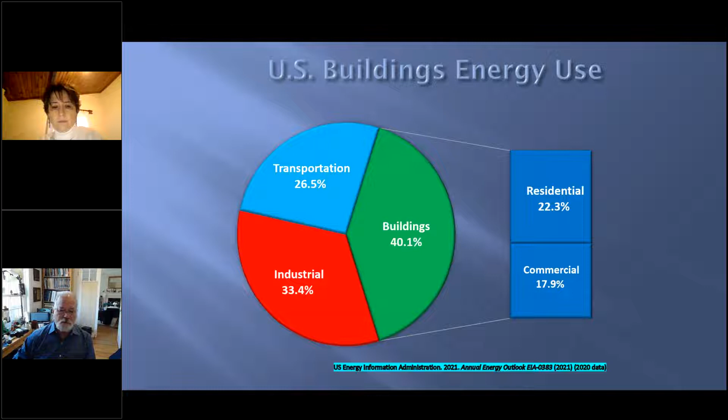In terms of energy use, it's important to understand that it's not just the typical things you may think your homes have, or even 20, 30 years ago - heating, water heating, maybe cooling, refrigeration, and some other appliances. But today we have many more things going on. We have more appliances, our televisions, even our computers are beginning to take more of a role there, even showing up on here as 1%.

But I think the important thing to see on this chart is not just those individual ones, but the other uses. A full quarter of things going on in our homes, energy uses, are now small devices like our phones and all the other things connected to the internet that weren't there even 15 years ago. So a lot of energy use is going for that hasn't been there in the past. So if we're going to deal with residential energy use in particular, we have to deal with all of it, not just the top 2 or 3.

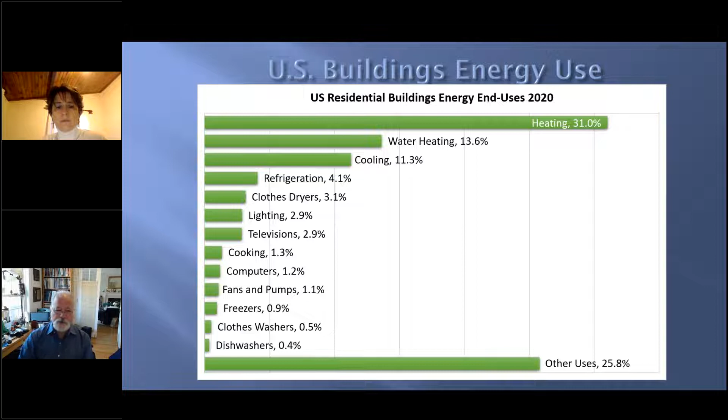In the commercial, non-residential sector, there is no typical building. If I were looking at a supermarket or grocery store, refrigeration would be a full half of the energy use, followed by cooling and lighting. So it definitely depends on the building type.

For offices, we're probably talking cooling, lighting, heating, and ventilation as our top uses. But there are a whole slew of other uses here, in this case 28%, and that's not including office equipment and computing, which contributes another 13% of the energy use - quite a large proportion.

So if we're going to deal with decarbonizing, looking at carbon as an issue, we have to deal with all the aspects of how our buildings use energy.

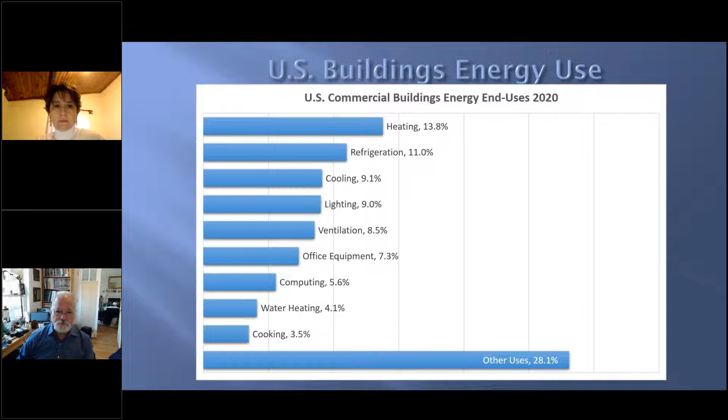So on to the topic, looking at climate change. First, let's look at some definitions - they're not the same. Weather is what's happening now: what the wind speed is, where the wind's coming from, what the temperatures are, what the humidity is, cloudiness, pressure, etc. It's kind of an instantaneous snapshot of what's going on. Climate is a composite of that over a region, or maybe over a series of years.

In fact, many times we talk about it being 2 degrees above normal, or very cold for this time of year, and that's based on a climate snapshot. In the meteorological world, they do a 30-year snapshot, what they call normals. So our latest set of normals would have been through 2020, and we compare to that past 30 years to see what's going on. We are seeing changes there, as you'll see as I move forward.

This is a snapshot from just before 6 in the morning to 6 in the evening, just one day at a research laboratory in Colorado. What we're seeing here is the variation - it's not static like we see if you're used to working with weather data for building simulation, where we're looking at hourly snapshots. You can see here this is changing at a 5-minute increment, which is more about the measurement than anything else.

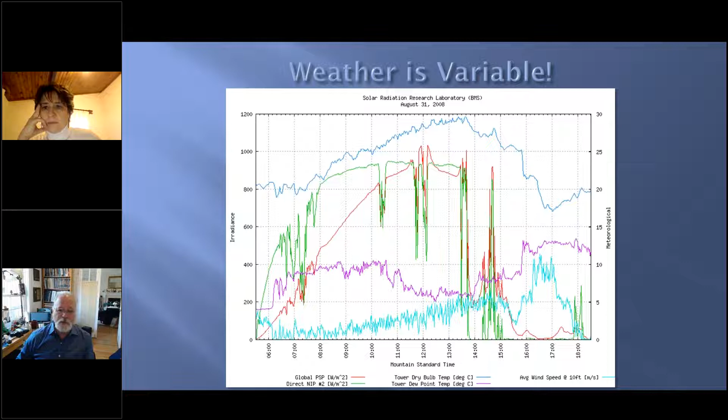So the New York Times has been publishing these really fantastic infographics where you can put in your city and see how much warmer it's been. 2016 globally is still the warmest year on record. I put in Istanbul, but I could have put in any others - I looked at Ankara, and it was similar sorts of things.

What they show you is a normal range - you see a gray area behind the red bars, and the gray area is kind of normal. What you're seeing is that for much of 2016, from winter through spring through summer, it was much warmer in Turkey, particularly in Istanbul. The average temperature is supposed to be about 16.6, and that year was 3 degrees above that normal - quite a bit more change.

At the bottom, it's a little harder to see, but total precipitation for the year was about 20% less than normal, so that can play into this as well. So this is one range of that.

The second warmest year, they did similar sorts of things, and in this case Istanbul was even warmer - it was a warmer year in 2019 than it was in 2016, and we'll see that vary. The global average doesn't mean it's always the same, but we're seeing consistently higher temperatures in winter, spring, and summer throughout the year.

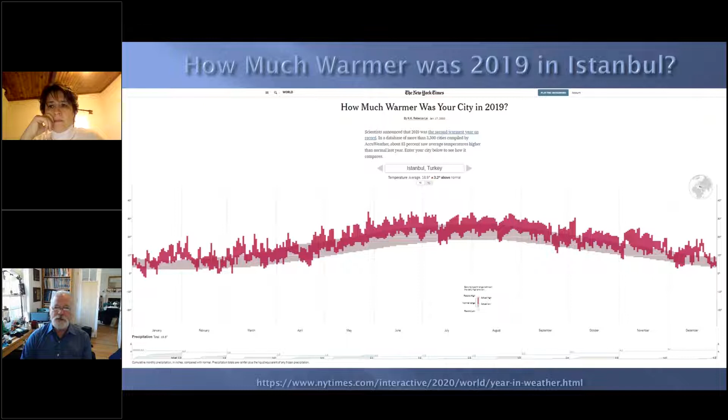So this gives you a snapshot of what's going on globally. Several things here - you'll see lots of gray right now, because there's no data back in the 1800s. As we get to about 1880, we get more consistent data.

You'll see that for much of early in the century, and even back to 1850, globally the temperatures were below that. Starting in the 1970s and 1980s, we're moving into the reds and oranges, and even in the 1990s we get some back and forth, with cold spots and hot spots globally, but consistently we're seeing that trend. By about 8 years ago, temperatures were already above that range, in the range of half a degree, and now in the last 5 years, the hottest on record, almost a full degree globally above that. So it's visible that from 1900 through today, we're seeing almost a degree and a half temperature change globally.

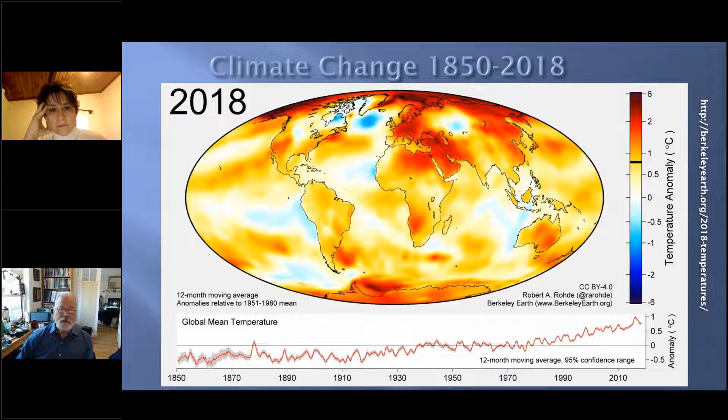In 2019, it was a particularly hot year in some places - China, South Asia, many parts of Africa, some parts of Europe, not so much in the United States, but Central America, South America, and in Australia they had a particularly horrible year, seeing temperatures in excess of 40 quite regularly, which was unusual for them. So it varies - it's not consistent throughout the entire world.

Another indicator is the North Pole sea ice, because since it's not on land, it doesn't stay frozen. If you watch the chart, it starts at about a volume of 25,000 cubic kilometers, and by 2017 it's dropped to only 15,000 cubic kilometers. So we've lost quite a bit of sea ice in that time.

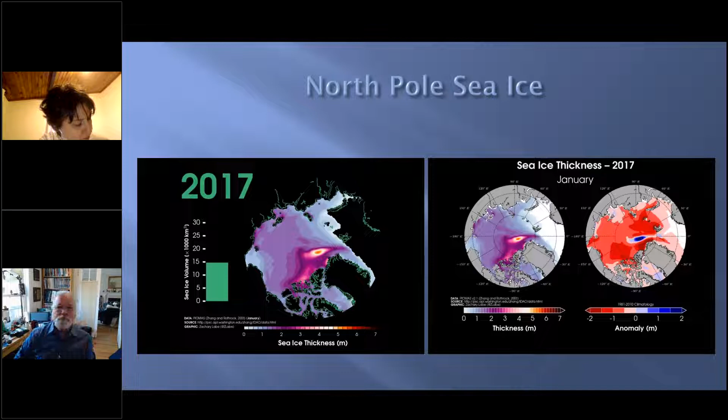We are also seeing temperature anomalies. I mentioned Australia, in the center, with very extreme temperatures hitting there, causing wildfires and very dry conditions. On the left, you see the far north in North America, and even parts of Asia and Europe, with northern parts of Russia and Scandinavia hitting record temperatures, so that in January it was above freezing at the North Pole, which just doesn't happen. In the US, we've had unusual temperature excursions of 10, 15, even 20 degrees above normal in what would normally be our cold time of year, January.

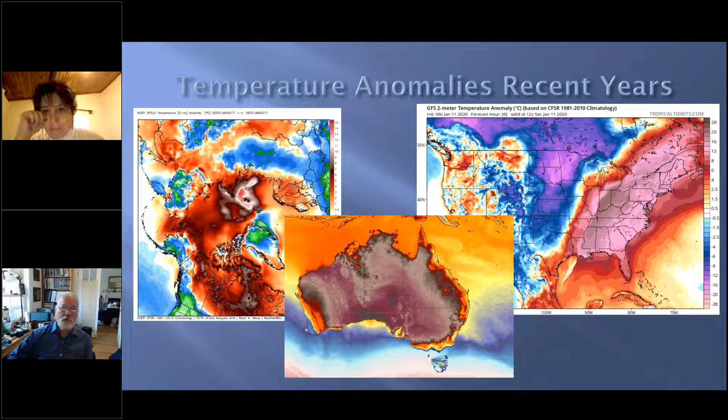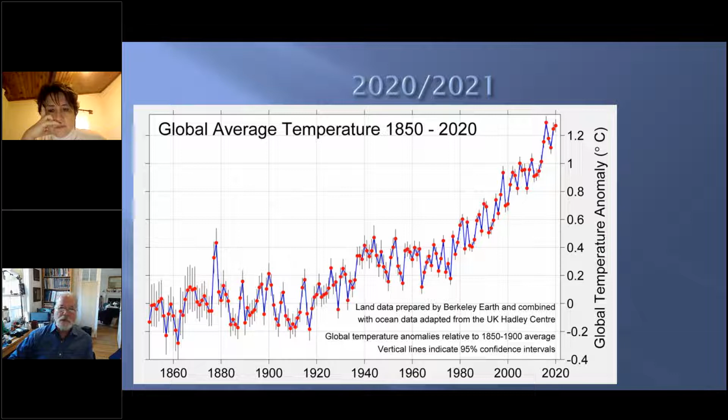Looking at that same data, the global average temperature through 2020 is already above 1.2 degrees, and the last 5 years are still the hottest on record, continuing that trend. In 2020 you see warm spots and hot spots, and in 2021 it's not consistent - India particularly had a cooler year, as did parts of Central Asia and Antarctica. But in general, globally, the Northern Hemisphere was quite warm this past year.

There's a great resource, berkeleyearth.lbl.gov, that you see at the bottom. I pulled up what it shows for Istanbul, able to extrapolate back based on the data they have to 1758, so we have 260 years of data to show what's going on there.

You'll see some temperatures - in the early 1800s the mean temperature was a little higher, then it dropped back. But if you look from about 1840 to 2000 or so, we have a trend that it's getting progressively warmer. Then suddenly, just about 2000, that change has gotten more significant. So the mean temperature for Istanbul, instead of being around 13.5, is now up over 15, and that is increasing. You see that in the ribbon bar at the bottom, which shows a snapshot for each year over the last 150 years, and the average temperatures there are progressing from the blues to the reds. So we are definitely seeing that trend already.

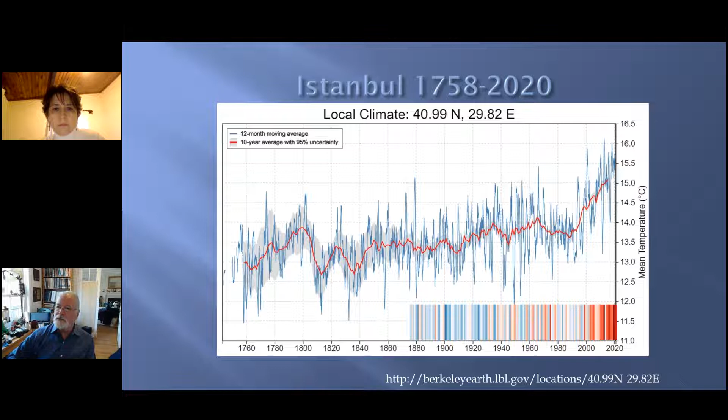The other thing to look at is the coldest and hottest months. In the past 15 years, only 3 months have actually made it into the top 10 coldest, setting records for that range. If we add the hottest months, almost all of the records and most of the temperatures in the last few years have been set in the last 10 years or so. If you go to the annual column, you'll see that 2018, 2010, 2020, 2019, and 2014 in Istanbul were the 5 hottest years.

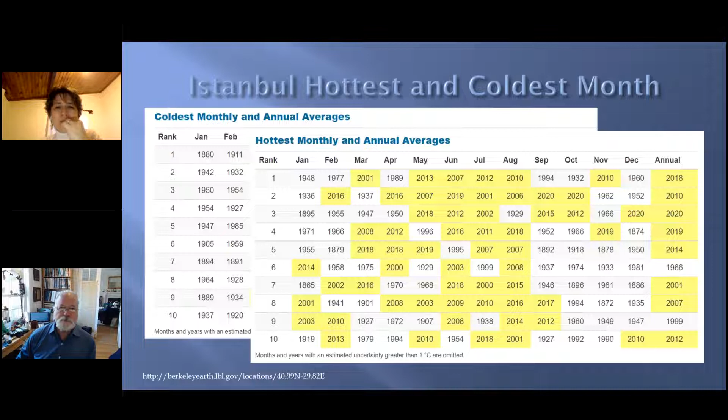If you look at the high temperature too, you'll see that we're seeing a range in extremes as well. The uncertainty gets better as we get to about 120 years ago. But if you look back about 2000, the...

Average max temperature in Istanbul was about 18.5, and now it's moved up to 19.5 in just 20 years. Similarly, we're seeing low temperatures also increasing, so at 2000 we're looking at 9.5, and we're approaching 10.5 at this point. So we're seeing a shift to both the high and low temperatures here, which is consistent with what the models show.

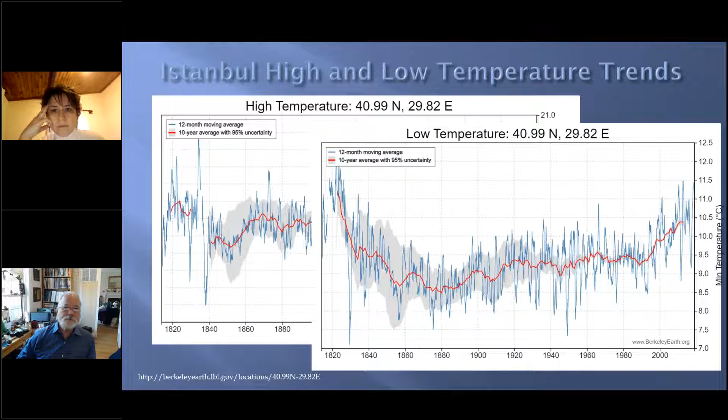There's a great book if you're interested in building performance simulation that has many topics, 22 chapters working on different aspects of that. But one of the chapters specifically is weather and climate, and how do you deal with that? So my next part of the talk is going to be derived from that, and I'll show you some of the information.

So what we talk about in that chapter are applications for simulation, and then what are their needs for climatic data and how they deal with it. So if I'm looking at doing energy evaluation, energy design, maybe compliance analysis with standards, I need a full year of data. Typically hourly is about the best we can expect.

So if I'm looking at other things, maybe equipment sizing, second column, third row, design day or short period calculations, where you're using near extreme conditions to size your equipment.

If you're trying to calibrate a model to existing building energy use, you might need weather data during the period that's collected near the building site.

And other things, you may need natural ventilation design, you're going to need local wind, and that's one of the very difficult ones. The sources for much of our data is still from airports. There are new sources available, but needing locally measured data is pretty important today.

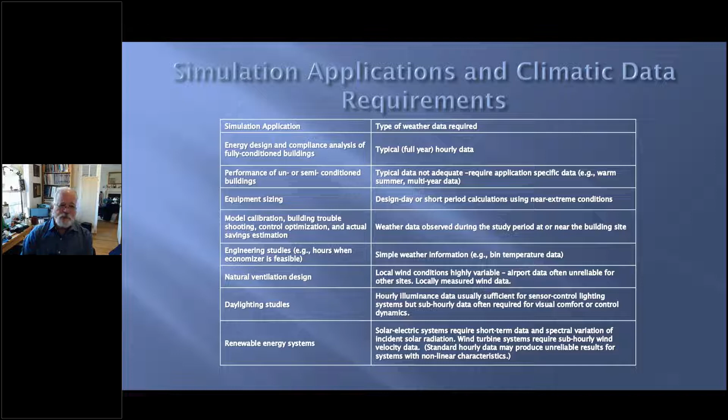Another one, daylighting studies. Hourly illuminance is just not sufficient. If you remember back to my chart about the variability, illuminance is one of those things that changes quite radically, even within a few minutes, due to moving clouds and different conditions there. So you may need that sort of information in detail.

Similarly, what are the elements you need? I'm not going to go through everything here, but dry bulb, that's one of the easy ones because we record that in many places, not just airports, and being able to get that. Similarly with humidity. Solar irradiance is a little more difficult to get. Till recently, that was mostly calculated just because very few places were actually recording it.

One of the interesting things that's happened recently is that a number of data sets have been merged together in what's called a reanalysis data set. So a single data set from satellite data is now able to combine many things, and they are particularly good at solar. Cloud cover, mostly we need that for daylighting sky models. Wind velocity and direction, interestingly, that's one of the things that can be derived from these reanalysis data sets—they can sense velocity and direction of wind from the satellite data.

And then other things you'll need there. Wind is one of those things that's notoriously missing for many cases, and depending on what you need particularly, it may be important to try to find good sources. The higher in this chart you go, the easier it is to get data.

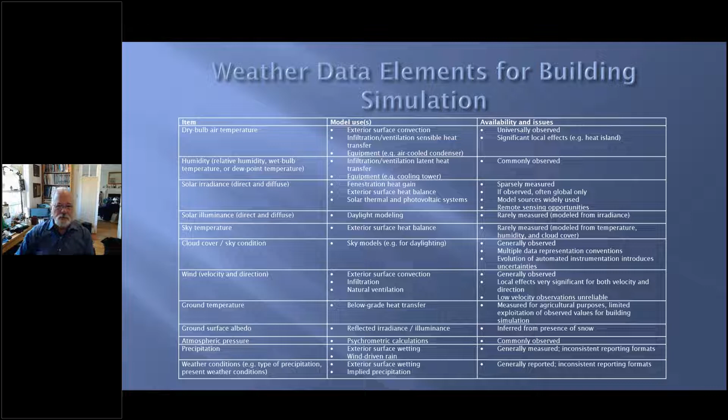So climate data, when I started my career, was scarce, and there were just a few what we call weather tapes, because they were physical magnetic tapes back then, available. Then that was what we had to use.

Data was only available from ground observing stations. Rarely do we see solar data, but a good range of other meteorological aspects. The wind data is problematic—at the airport it's usually an open space, no obstructions, and if we're talking about a city or we've got any sort of terrain variation, it'll make a big difference. And other data is often limited or just not available.

Now, I mentioned the satellite data. The accuracy is quite good. They've been working with NASA here in the US on some of their data, and they are able to replicate some of the design conditions that are in the ASHRAE handbook within about half a degree, which is pretty remarkable given that it's gridded data and that it is remote. It is not a temperature on the ground.

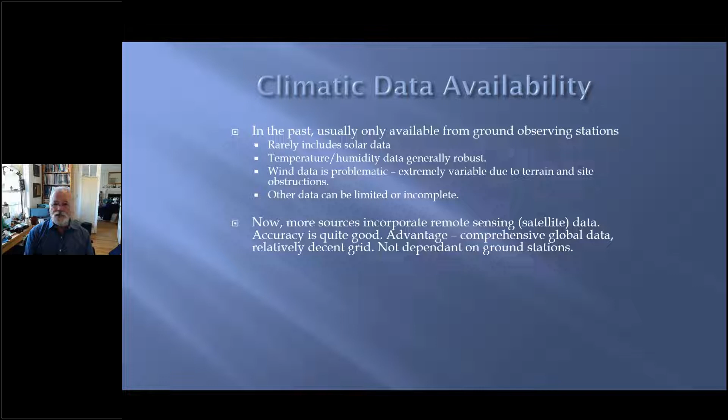The good thing about it is we have a globally consistent data set, a relatively decent grid that's getting better. Some of the data sets, like ERA5 in Europe, are dropping down to a 30-kilometer grid, so it's quite fine resolution. There are some issues with these data sets though—they tend to not do well around large bodies of water, so coastal data is not as good as inland data, but as a consistent data set, they're actually quite good.

So there are global master data sets. The US NOAA, the National Centers for Environmental Information, are a repository for data for the World Meteorological Organization, and these data are updated nearly real time. You'll get them usually at least the next day, and it's pretty accurate. They keep that data set and keep expanding it.

But the data we use as engineers doing building simulation needs more summary and calculation. For design conditions, we derive that from historical period data, and we need other data that maybe the ground stations aren't recording, particularly solar radiation, because the global data sets that WMO hosts are not real time, or do not include solar data for the most part.

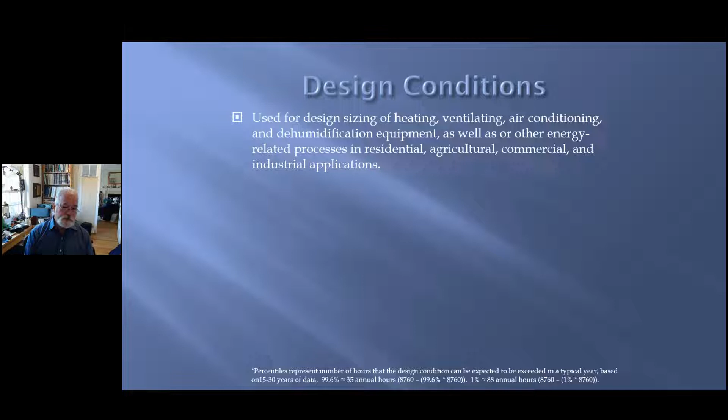So when I'm talking about design conditions, these are the temperatures and humidities, maybe even wind conditions, that you're using to size the heating, ventilating, air conditioning, maybe dehumidification equipment. They're also used in other industries—agriculture, industrial applications as well—just trying to get a feel for what they are.

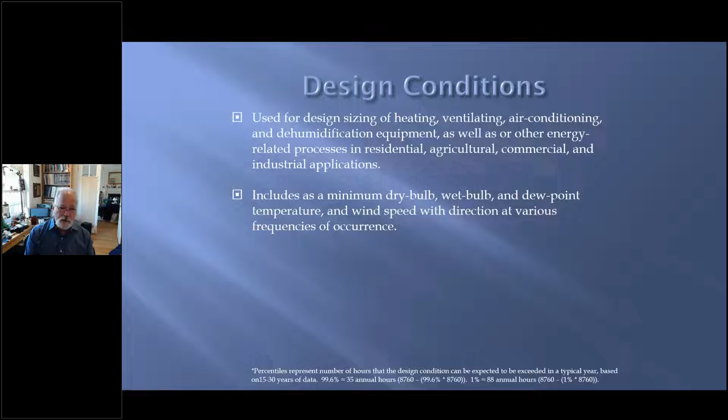Within the ASHRAE community, what's typically used includes dry bulb, wet bulb, and dew point, and maybe wind speed, with various frequencies of occurrence for those.

In the US, we typically use a typical percentile of 99.6 for heating and 1% for cooling. Now, what that means is the percentiles are representative of the number of hours that you might expect the temperatures will be exceeded in a particular year.

So 99.6 means we've got 0.4 percent, or about 35 hours a year, that it's going to be colder than that. For the 1% case, that means we're going to see about 88 hours a year that are going to be warmer than that particular case.

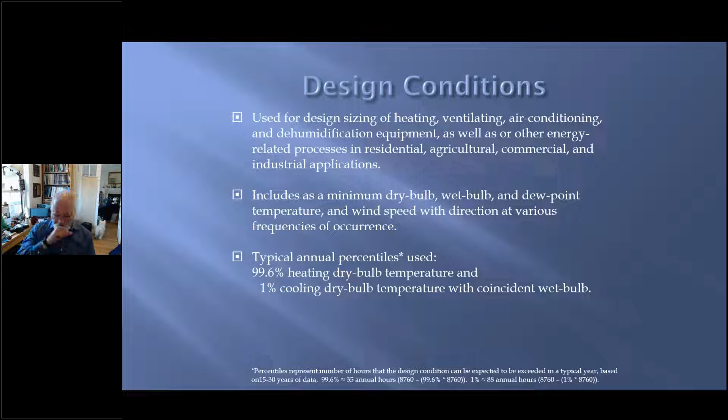And that's partly because we don't want to design for the most extreme condition, since it won't reach that very often. So there's kind of a balance of reasonableness and being able to meet the load, at the same time not paying for more capacity than we need most of the time.

So different applications have different percentiles, and ASHRAE now is recommending using monthly cooling calculations, often because the peak loads may not be in the middle of summer, particularly as sun angles drop. We'll get more direct sun on surfaces and windows later in the summer, such as August, September, even October—we've seen variation there.

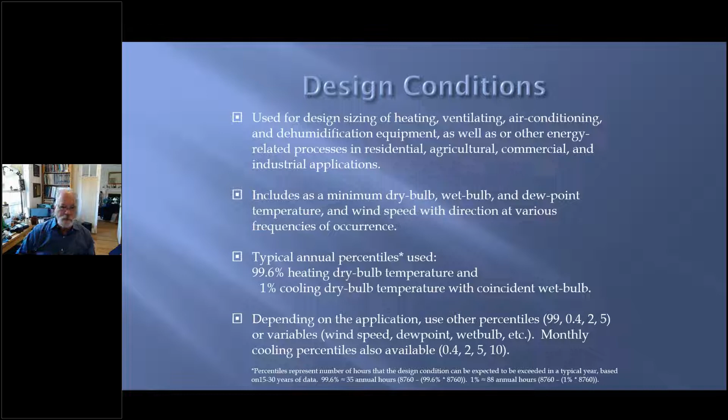So chapter 14 of the ASHRAE Fundamentals is the most comprehensive source I'm aware of. They have over 9,000 locations throughout the world, up about 1,000 over the previous handbook. It gets updated every 4 years, and uses much of the data from that WMO repository at the NCEI, including data through 2019.

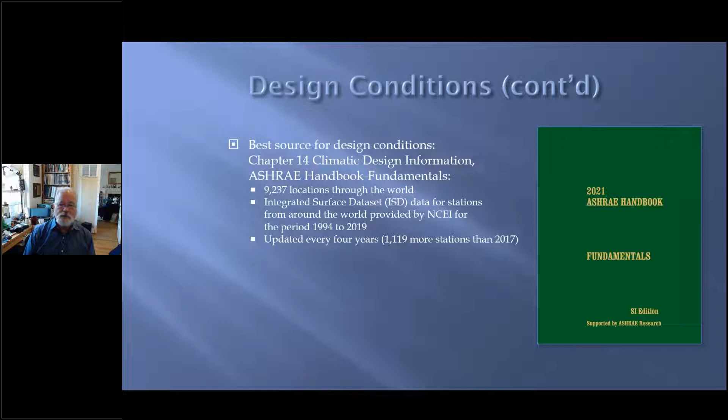So this begins to give us a snapshot of what's happened in that past hottest period, where 2016 onward are the hottest years, and we're beginning to see some of that in there.

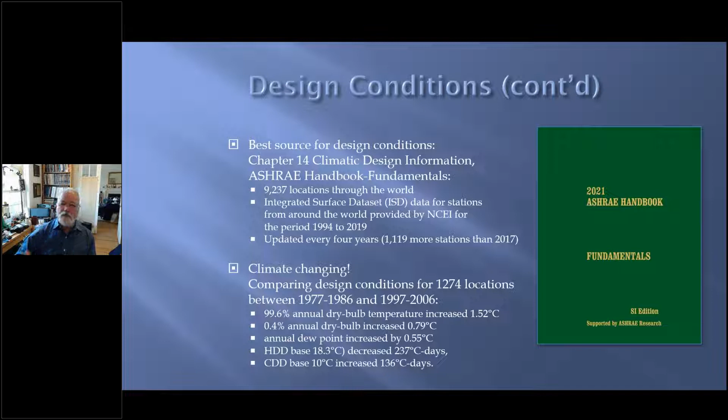In a study done earlier—this would have been for the 2009 handbook—they were looking at locations that had existed in the period of record for a long time, and what they were already seeing was that the design condition was changing, with an increase in the dry bulb temperature of about 1.5 degrees and the cooling temperature about 0.8 degrees. So we're already seeing that in there, and kind of see that in some of this.

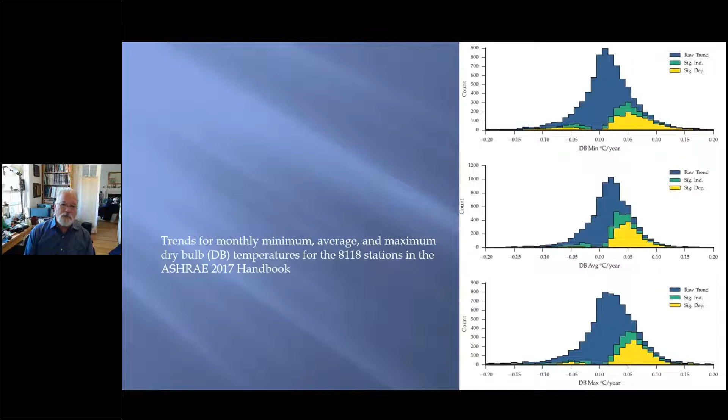Some of these stations don't have a real strong signal or no signal, and you see it varies—some of the locations actually got a little cooler, some of them got quite a bit warmer. And so the changes are still relatively small, in the range of 0.05 degrees per year, but we are seeing that change specifically in the signal.

So the handbook—these are where the 9,000 locations are. You see fantastic coverage in North America and Europe, and pretty much through East Asia.

But Africa is kind of problematic. South America, well, a lot of that is still the Amazon, so there's not a lot of locations, but the population centers in South America are actually pretty decently covered.

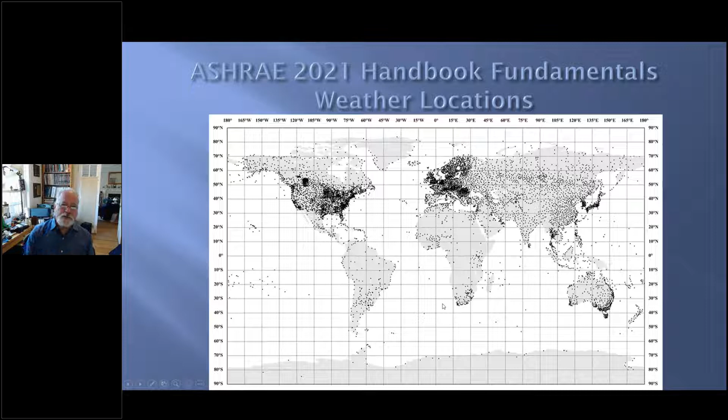The one thing that was kind of disturbing about this, you see South Africa having lots of locations, but the largest economy in Africa, which is Nigeria, in the corner of Africa, had no locations until this year. There just wasn't sufficient data to be able to derive that.

ASHRAE provides an online station finder so that you can go and translate that data. You see the numbers here, and what those represent are the number of nearby stations for that.

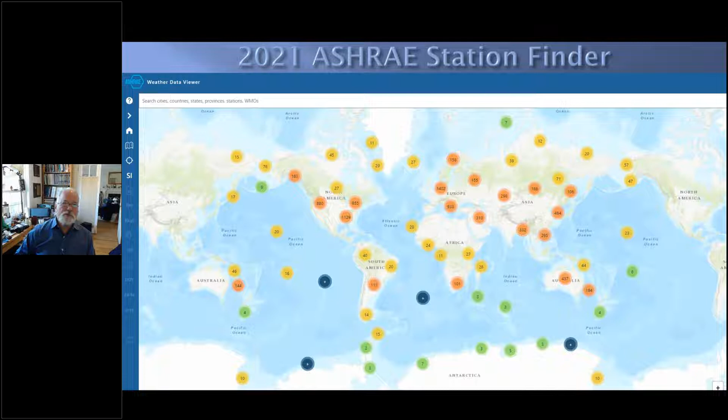So I can zoom in on this. I zoom to Turkey. I can begin to see that there's good coverage in Turkey, not complete, but there is coverage. Everywhere you see a darker circle with a plus in it means that there is a location. So I'm going to zoom in to Istanbul and try to look at there.

So we have, you can see that there are a number of stations, the old airport, the Ataturk airport there south of Istanbul, and then a number of others throughout the area. So let's zoom in a little further. We can see the airport there.

And then if I click on that, what I will get is the single page summary. And this gives all the data we've been talking about, I'll go into more detail, but we've got annual heating and cooling, we've got monthly design condition, and we have historical trends as some of the key features here. But you'll begin to see a lot of the different parts of that and how that works.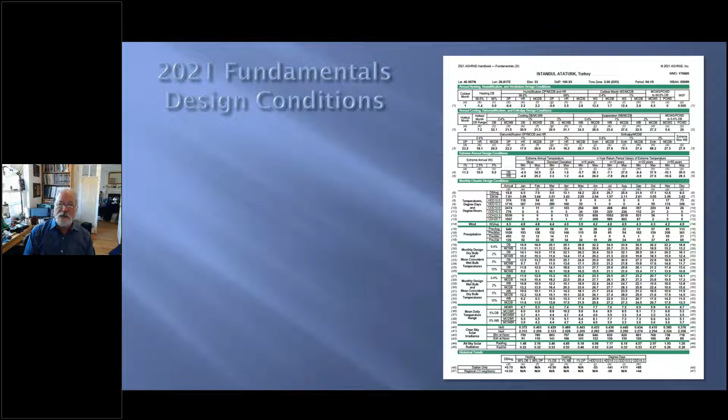So if we zoom into the top, this is where the annual heating and cooling design conditions are. So for heating, dry bulb at 99.6, we were just talking about, it's set at -1.4. If we do for annual cooling, if we're looking at the 0.4 or the 1%, sorry, we're looking at a dry bulb of about 30.9 and so on. You can see the variation there going on.

There's also a section on extreme annual conditions, and these include wind speed, and then there's some derivation of what it might be based on statistics, not based on data of the wet bulb and dry bulb. The max temperature might be as high as 39, min temperature -10, and that's based on statistics, not the data.

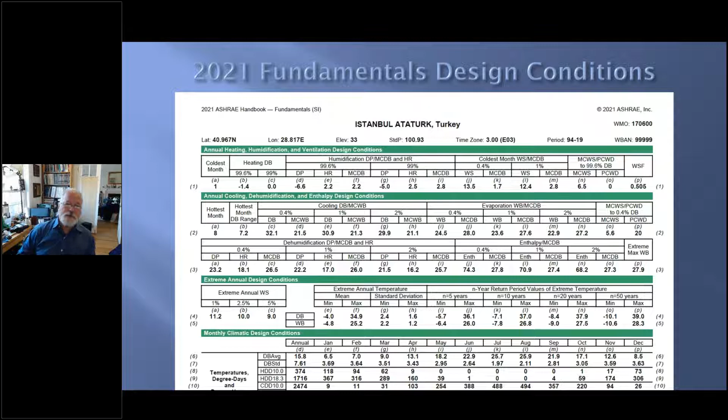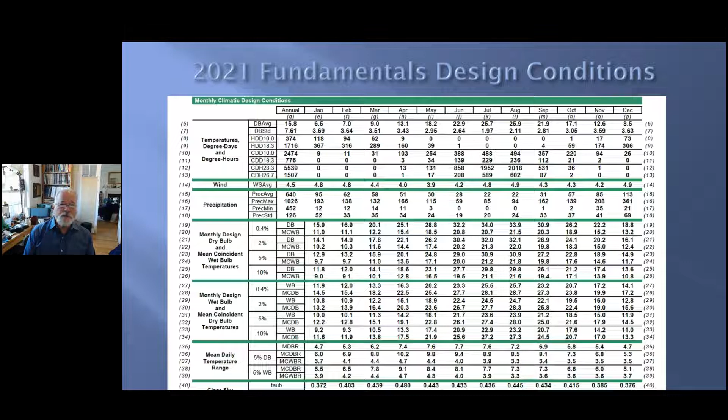The next section is monthly, and that includes temperatures, degree days, degree hours. Also wind speed by month, so you'll see annual variation on that. Precipitation also, and then followed by those same design dry bulb and wet bulb temperatures. So you can see that based on annual and monthly basis, how they vary over the year. Mean daily temperature range, and then finally at the bottom, which also includes clear sky solar irradiance for design calculations, as well as an all sky.

Something new that got added this last time is the historical trends, and where there is a statistically significant trend, we'll begin to see it. So the station already is showing about a half degree change, 0.59 degree, in the 1% dry bulb, and changes we are seeing in the degree days as well. That's not unusual. There's also regional variation, seeing similar but not quite as strong a cooling increase temperature there.

I mentioned NASA Power. This is the NASA website. They're able to replicate the same sort of information. They have not done a complete set, there are some pieces missing, you see the gray there, but they are actually able to replicate the same point. You can select the time extent, so you can match the data set there, and that is continuing, the data is continuing to get updated.

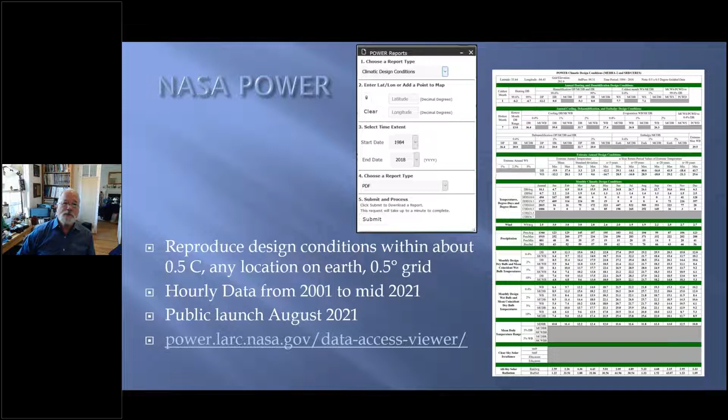If we're looking at climatic data for building simulation, we need data usually from a single year, not multiple years. You can do multiple year, but usually we're looking at a snapshot. The typical meteorological year, or TMY, is the most widely used, and there's an ISO standard around that.

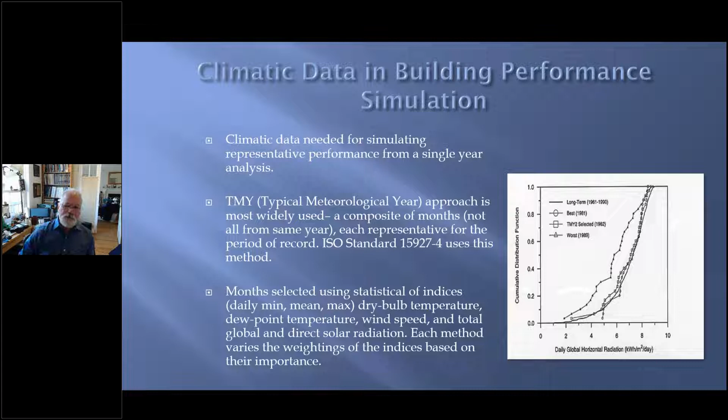Essentially, it's a composite of months. They won't all be from the same year, but each is representative of that period. The months are selected using statistical indices around dry bulb, dew point, wind speed, and total solar. Each method has a bit different weighting, so temperature and humidity may be weighted higher than solar radiation in some cases, or the other way around. There have been various studies, and they do make some difference, but in general they often give the same sort of results.

TMY data sets are really best for certain things. If you're trying to look at alternatives during design, say comparing two different windows, a low-E versus a double pane, keeping the climate data the same, I can see the variation due to that, or maybe an increase in insulation or efficiency on the HVAC. They're also ideal and required for most performance methods for building standards or codes, and even green building rating system points, which want a consistent data set.

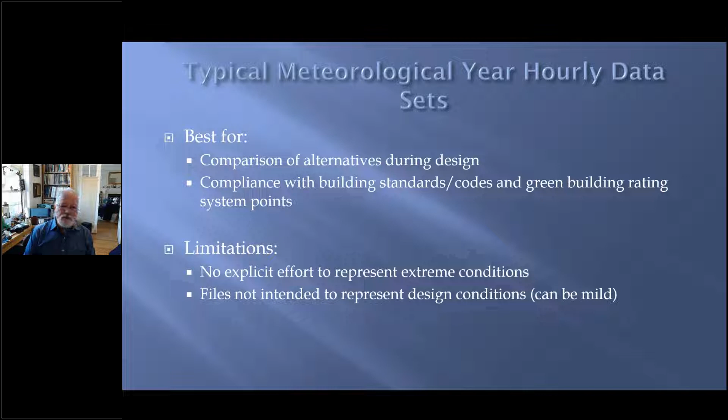Some of the limitations though: they're not necessarily representative of extreme conditions. Remember, they're trying to be typical. That doesn't mean they won't have some extremes in them, but they also may not represent design conditions. I've seen that they mostly can be close, but some of the older data sets were very different from the design conditions. Now they're not as different, but they can be mild.

There are lots of data sets available out there, all sorts of ones throughout the world. I know there's one available in Turkey as well, not necessarily on this list. I'll talk a bit more about the one on the bottom, the TMYX, toward the end, but that's the most comprehensive, with a global data set of 13,000 stations at this point.

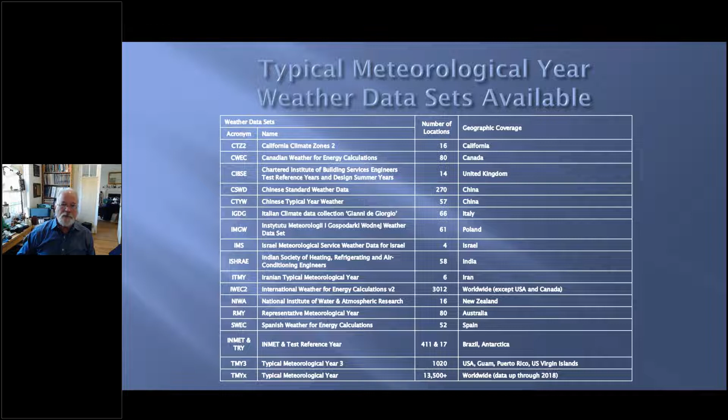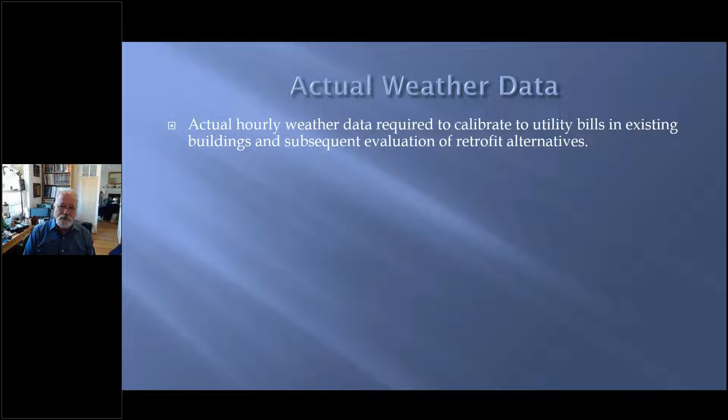Actual weather data is also needed. Sometimes you need that if you're trying to calibrate an energy model to a utility bill. You need weather data matching that period so that you're comparing correctly, and that's become increasingly useful and available.

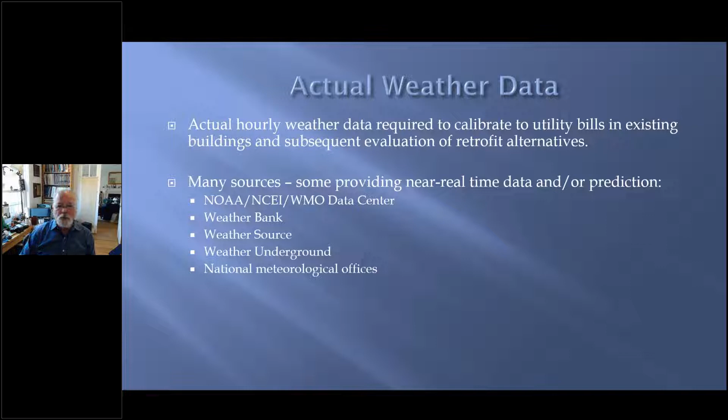There are many sources out there. I mentioned the WMO data center at NOAA - that data is available, but it has no solar data. There are a number of other private and public sources. Many national meteorological offices can also provide data similar to NOAA, and they often have more data. NOAA's data set includes about 20,000 stations globally, but that's what's reported by each country, and they don't always report everything.

The biggest issue in working with any of these data sets is how complete are they. Does it have what we need - at least temperature, humidity, wind, and solar? The answer is often, but not always. Some of these are more focused on snapshots of what you're looking at. If you're looking at public sources, temperature, humidity, and wind is about all you're going to see, and you'll have to fill in the solar radiation data to be able to use these.

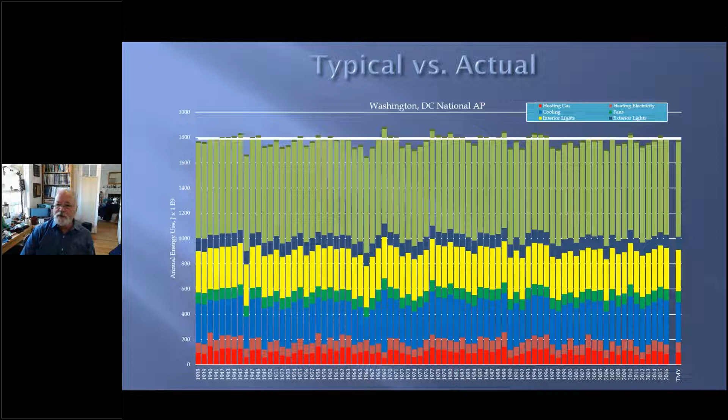So it's not just heating or cooling, it's a combination of the two. The good news is if I draw a line through at the TMY value, it's doing what it's supposed to do, capturing the median of what's happening. It's not as extreme as some years, but not as low as others either, and that's its usefulness.

But if you're trying to capture this variation, you need actual data. The past 5 years have been the warmest on record. The ASHRAE handbook fundamentals are updated only every 4 years, so it can quickly lag. The difference between the 2017 and 2021 handbooks was quite significant because we were capturing those 5 years that had already changed. TMY data sets are also infrequently updated — the TMY3, typically used in the US, just partly because it was easily available, has data only through 2005, so it hasn't caught any of the last 16 years of more extreme data.

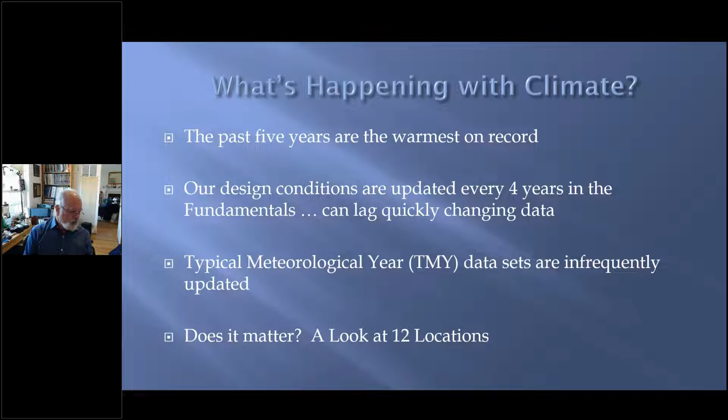So we did a quick look at 12 locations to see if something has changed. This is a list of some of the data sets we use, some of the earliest in the US — TRY, TMY, then TMY2 and 3, IWEC, an international set from ASHRAE, and IWEC2. But those only go through 2008, and then the more recent TMYx that I mentioned.

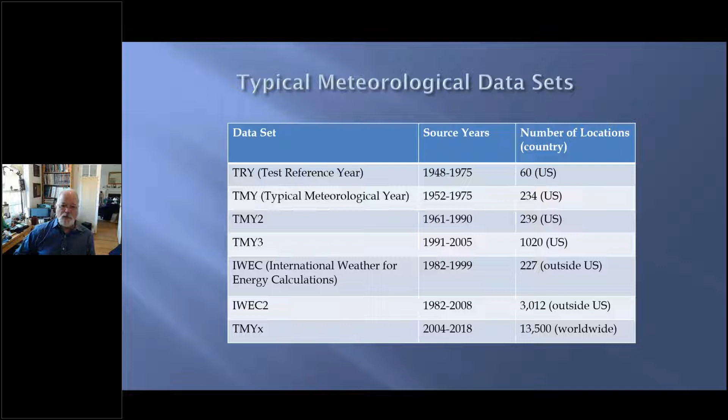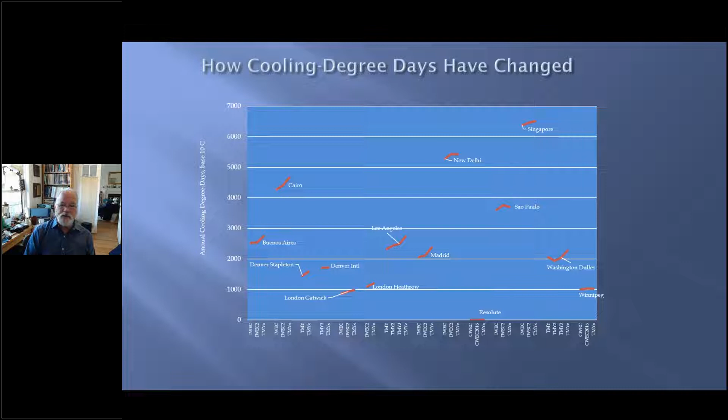From a cooling standpoint, we get the opposite impact. At bottom right is Resolute, a very high latitude location in northern Canada, above the Arctic Circle, so it has essentially zero cooling. But looking at all the other locations, we see a trend, not always upward throughout the data sets, but consistently by the end we're seeing increases. All locations, even hotter ones like Cairo, Delhi, and Singapore, are continuing to get hotter, and even milder locations like Los Angeles and Washington, near me, are also changing.

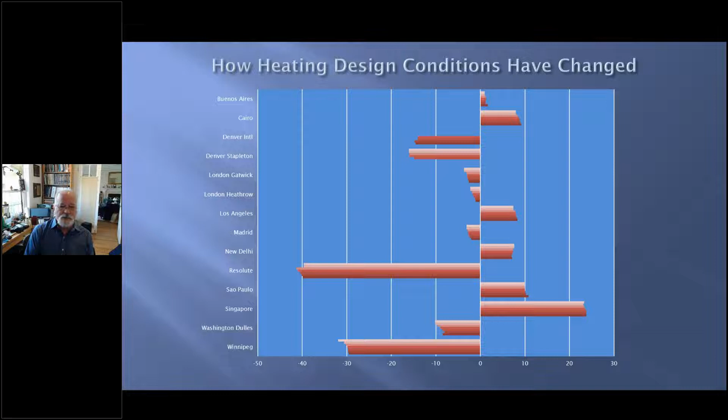If we look at the design conditions — these are heating design conditions — starting from oldest to newest, Buenos Aires has increased about a degree or so, Cairo about 1.5 degrees, London Gatwick and Heathrow very similar, Los Angeles and Resolute also, although some early temperatures were a little cooler, it's now moving that direction. This is a snapshot of the handbooks across the past 24 years, the past 6 handbooks, and we're seeing changes consistently throughout.

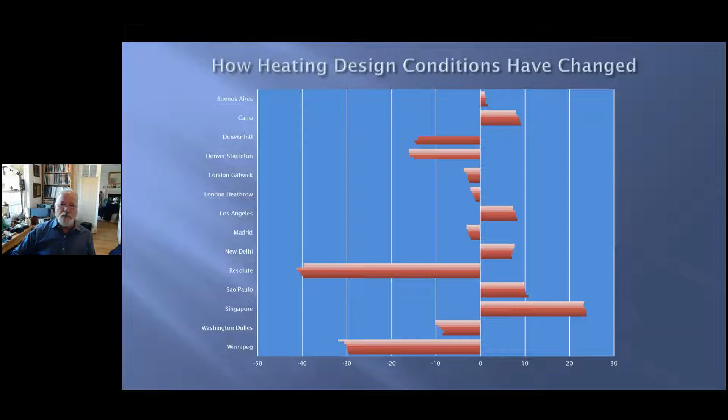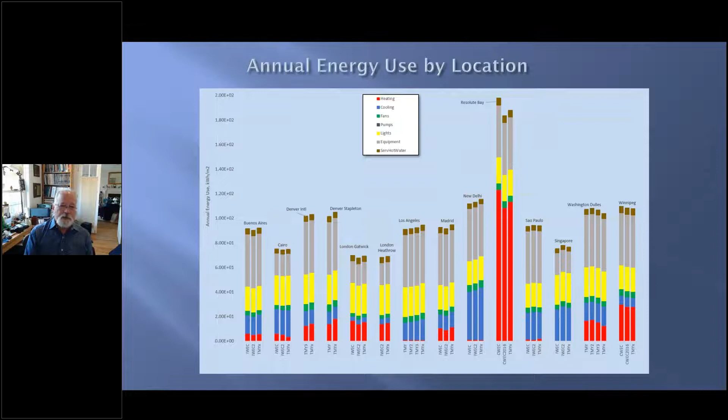Looking at what this converts to in terms of energy use, we see a consistent change for cooling-dominated locations like Delhi, Sao Paulo, and Singapore — a trend toward higher energy use. For locations with significant heating, it's more of a mixed bag. In Washington Dulles, for example, you actually see a decrease in energy use, and the red bar representing heating is going down, consistent with what we'd expect from the temperature changes. So we are seeing changes, but they're not consistent across the board, depending mainly on how heating and cooling trade off.

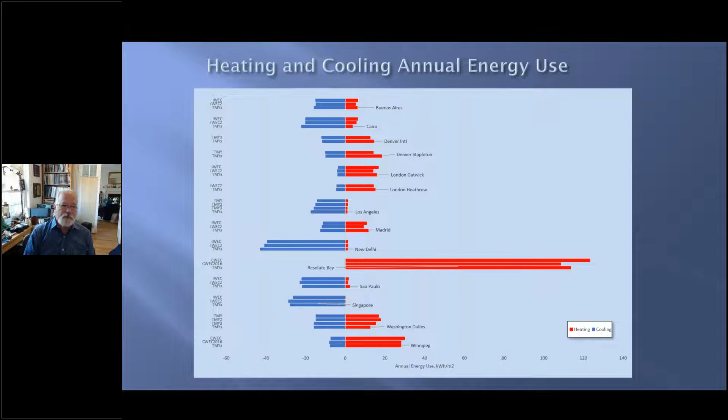If you separate out the heating and cooling, you can see that more distinctly. In Cairo, the second set of bars, you see cooling increase and heating decrease consistently. That's a kind of change. But if you look at New Delhi, heating is almost non-existent, but cooling is significantly increasing, and we're seeing that in many of the other locations as well.

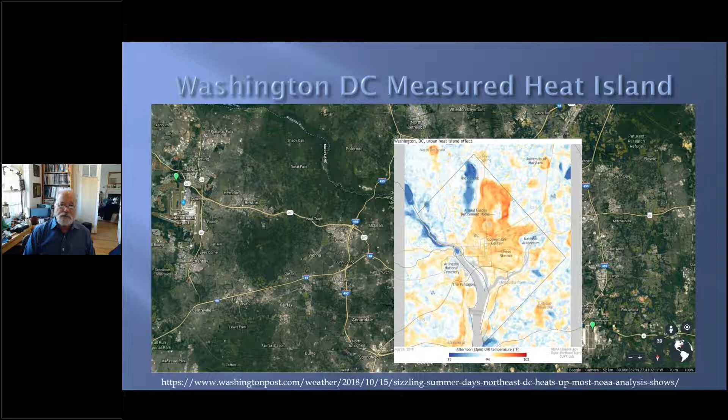These temperatures are recorded in Fahrenheit, and what we're seeing is a variation of about 17 to 18 degrees from hottest to coldest, so the built-up areas of the city are much hotter - we can see temperatures that are 10, 15, maybe even 20 degrees warmer. So that park, Rock Creek Park, the national park I mentioned, is significantly cooler even on one of the hottest days of the year.

This was in August, definitely our hot period. Also, the water, the river that flows through there, you see kind of to the top left - that's having a cooling effect as well. So all this plays into play. And remember, the airport is right there, kind of off center - it's very much affected by the water and the temperatures there. So urban heat islands are a huge influence on what we should be doing.

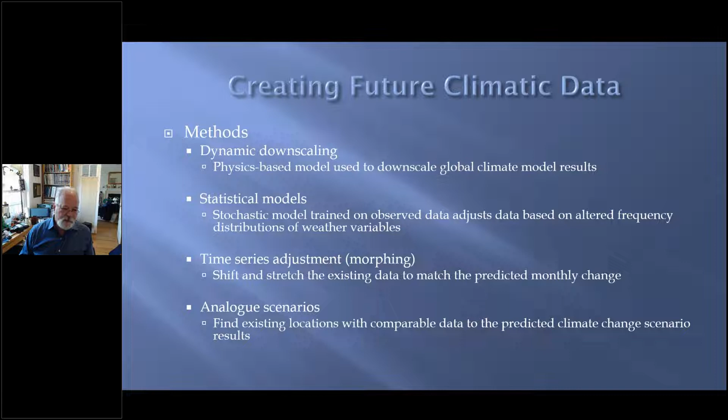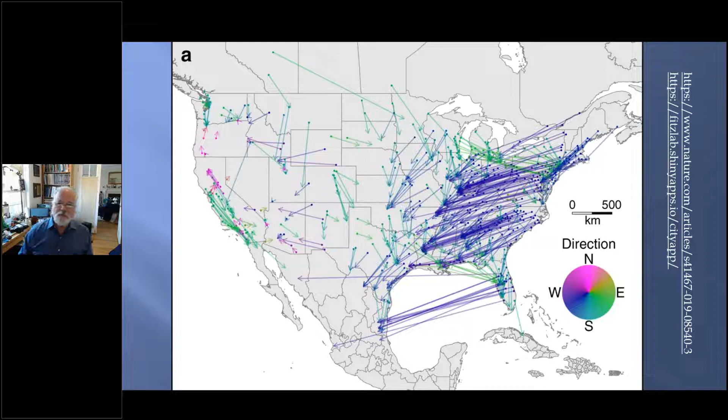There's also an analog method, and I'll show you quickly what that would be. There are sites, at least for the US, that show you what the future temperature would be like. I did one recently up in Michigan, and the location was relatively mild, but it's going to get significantly hotter - that's what you can do with analog, find a climate that is similar to what is predicted you'll be in the future.

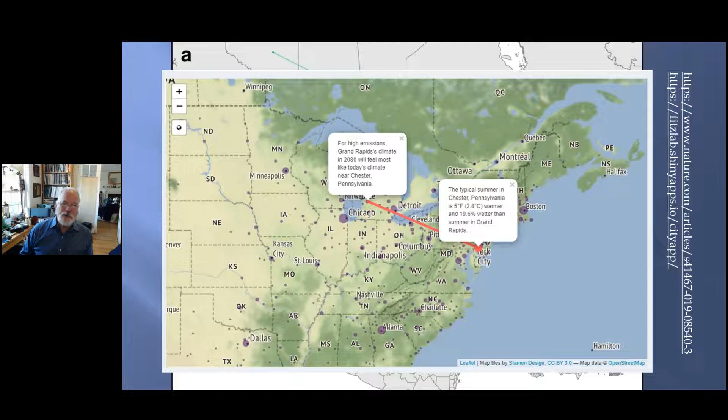So the IPCC - this is showing the 2013 data - new data has just come out this past week, you've probably seen some of it. They develop storylines to represent different pathways forward: sociological, technological, and environmental. They're each updated for each report. The AR6, Assessment Report 6, was just released this past Monday, so I don't have that yet.

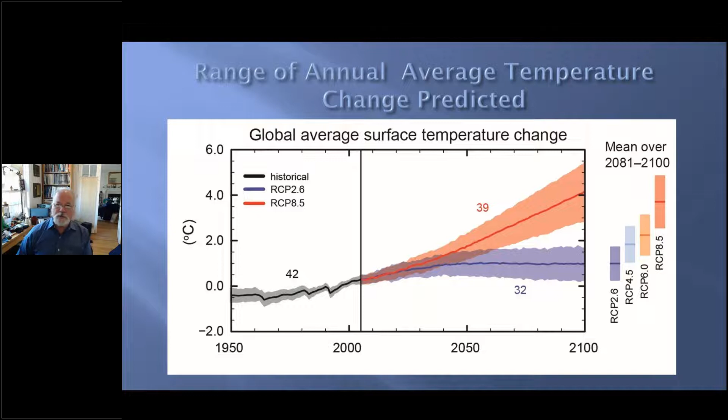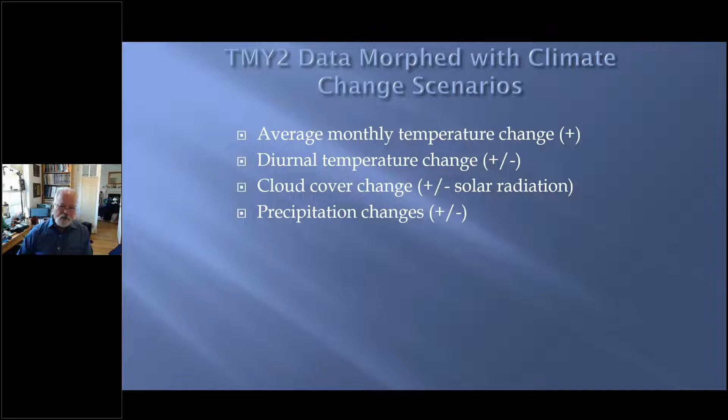So if we take the data and use that third technique, morphing and stretching, what we're going to see are temperature changes, both monthly and diurnal, then some cloud cover adjustments to recalculate solar radiation, and also precipitation. Here's an example of one done.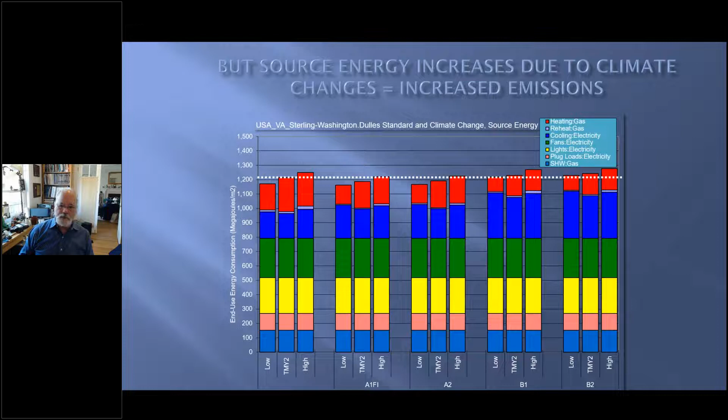Site energy tends to decrease in this location, consistent with what we saw. Heating's lower, source energy's higher, but low energy buildings tend to mitigate most of the impact.

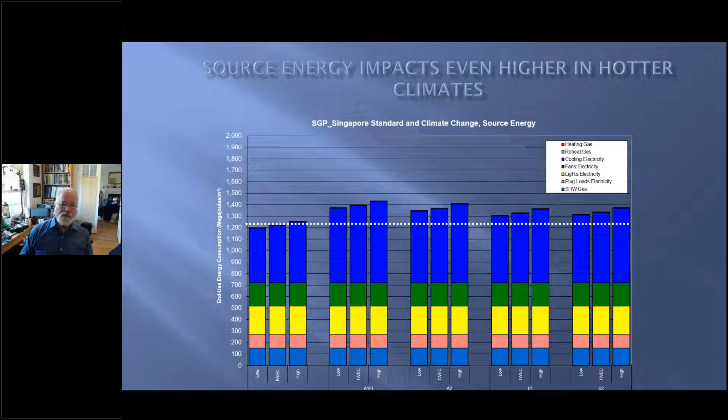In Singapore, it's kind of the opposite—there's no heating, so we're just seeing an increase in cooling. Again, low energy buildings kind of mitigate that, even in the semi-tropical, tropical case.

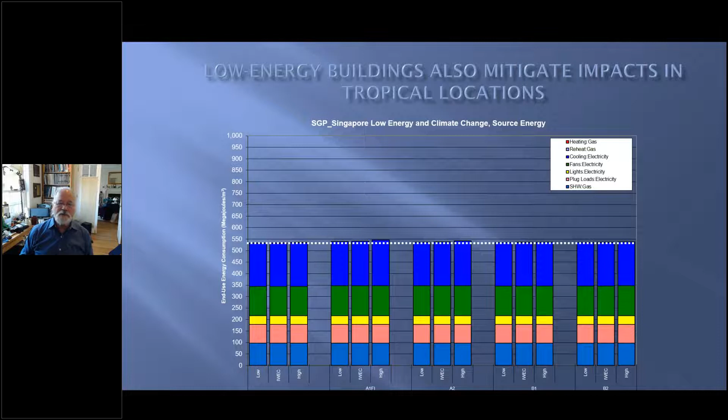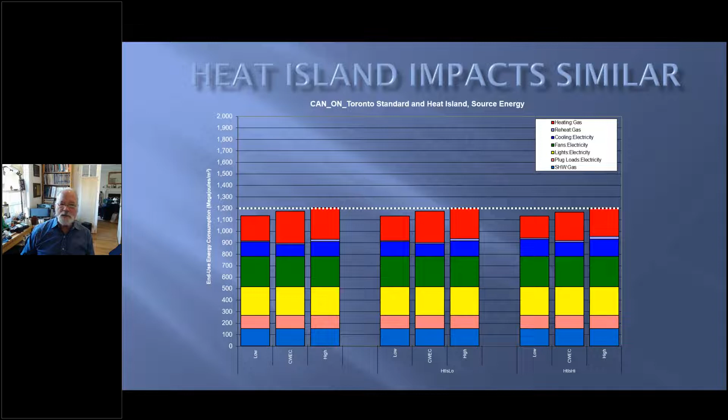On Heat Island, similar sorts of impact, not quite as distinct, but we're getting a combination of Heat Island along with the other case as well. On a monthly predicted change, we've got similar things, but now we're seeing in Toronto that push into other parts of the year that normally would not have cooling, and significantly less heating.

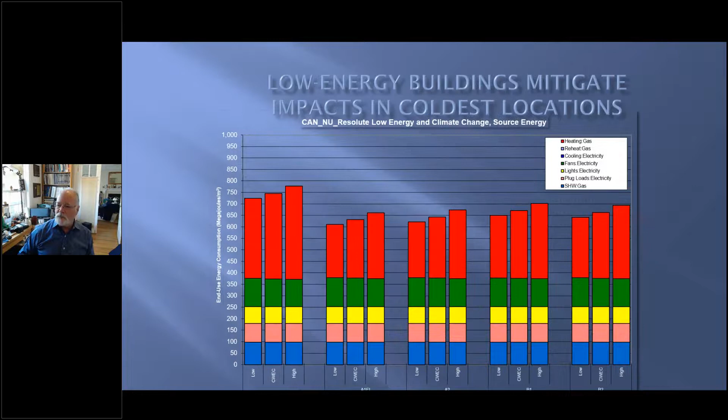The northern climate's even worse—we're seeing a 40% change in heating there. Keep moving here. The largest changes we are seeing really are in the monthly end uses, so you can see a snapshot here.

So, okay Gülsu, I'm ready. Okay, thank you, sorry, Dru. Thank you, it's really nice information, nice statistical data regarding weather. Thank you, and I'm sorry, the electricity was cut off here and I now have a candlelight, a very romantic atmosphere—sorry for that. Anyhow, there are questions actually, I'll just quickly ask those to you.

One is related to directly asking for advice from you, considering the climate change scenarios, the RCPs—recently, which of the simulation programs or tools can be used? For instance, DesignBuilder has a good interface for that. Is it possible to use this tool, or any other tools that you would advise for designers and professionals?